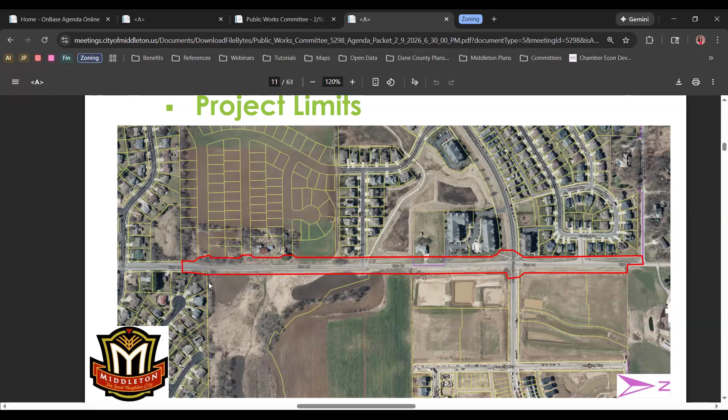Project limits: the north side to the right of the screen is Greenbrier Road, and the south side to the left is our project limit right at the end of the New Pheasant Crossing subdivision. Right now it's a very narrow road, a rural section with a hill on one side, and we're going to urbanize it into a wider section.

Right now you've got cost allocated, but as we refine this design we'll have updated cost estimates that break this down into each budget category. We're anticipating that later in April this year.

Here's the current schedule. Public Works tonight, and then Water Resources. They're working kind of hand in hand with MSA. We're going to do a handoff here on the stormwater design for this part of it, which will be presented at the next Water Resources meeting. As we continue to move forward with our design, we'll present our options at these other meetings. Currently, final design and permitting will happen in the second half of this year, with bidding in early January and construction planned for next summer.

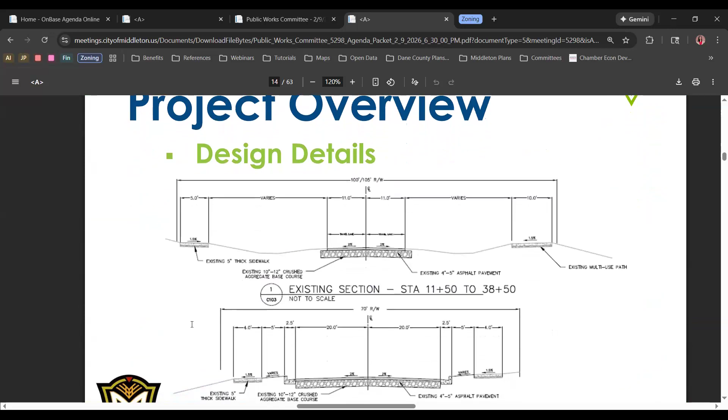This is the existing section, very narrow, maybe 20 feet wide with ditches. You have sidewalk in some spots, a path, and a future path in other spots. The other existing section is the urban section running on High Road that we're changing from, going to a little bit wider with a median.

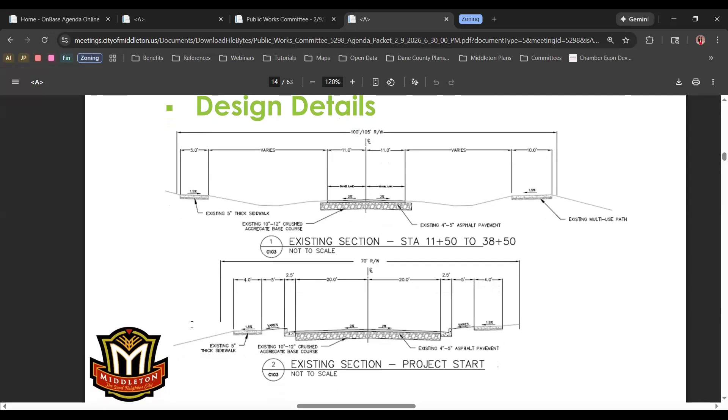We can go to the next slide, which should be the proposed details.

This is your proposed typical section. It has a wider median, with travel lanes northbound and southbound divided by that median. We have an on-street bike lane with a 2-foot buffer, then curb and gutter, a nice terrace, and on one side a 10-foot multi-use path, and on the other a 5-foot sidewalk. This median option allows for a nice left turn lane to be added where needed.

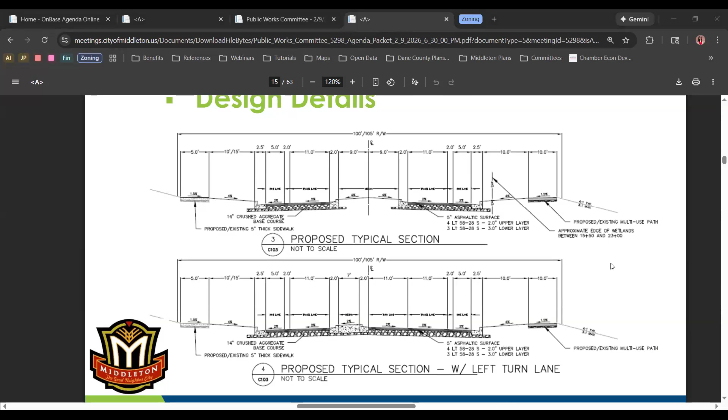At a certain part of this project, you have wetlands on the east side that we would be impacting with our typical section, shown on one of those lines about where it is, kind of behind the curb. So we would be filling wetlands with this current typical section, and that's something we'll have to run through alternates with the DNR on.

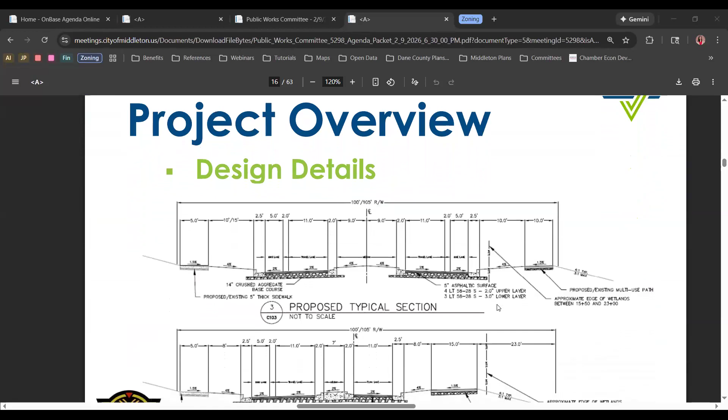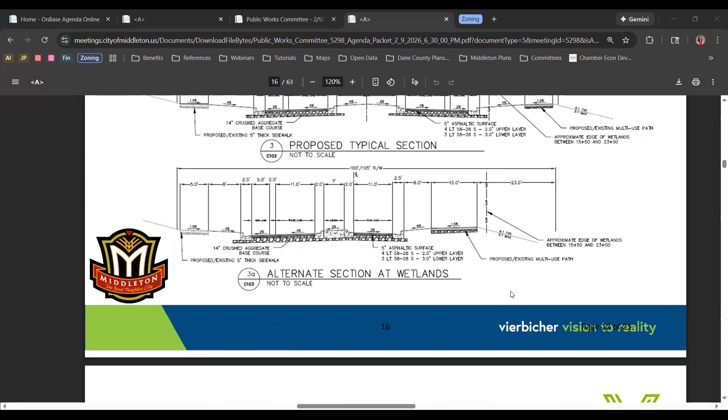That's the alternate section with the wetlands there. You could narrow it up, but it really changes the look of the road and what you'd want to do there, but it's something we need to run through with the DNR. I just wanted to bring that up.

This is the stormwater overview of the different areas and the options. The current idea is to put a bioretention basin near the Belle Fontaine intersection, with maybe some other upgrades and an oversized pipe somewhere that might get us the stormwater requirements we need. We'll learn more about that at the February 18th Water Resources meeting.

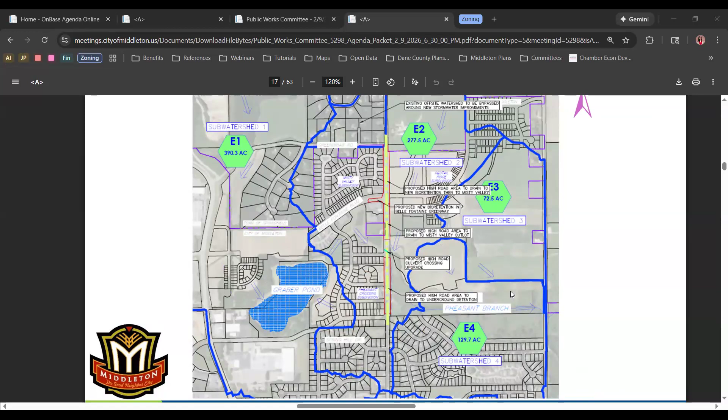We had our active input session that went really well. We got a lot of sticky note comments that I have pictures of. I basically summarized all the comments from that and the comment cards left onto an Excel spreadsheet, and shared that with city staff. I don't know if that got out to everyone, but it certainly can if you don't have it already. With that, I think you can go over to the memo.

A lot of the comments we received in discussion were based on speed concerns from the public, especially coming down the hill.

There was a lot of concern that people are too fast and won't be slowing down. There were pedestrian-related comments about where they wanted crosswalks, and whether we want rapid rectangular flashing beacons in certain spots. What's our trail connection access going to be?

There were also some construction-related comments, at least one about pedestrian access during construction. And there are some offsite concerns we can talk about—the Greenbrier intersection and Spring Hill intersection—regarding traffic there and wondering if those can be addressed somehow.

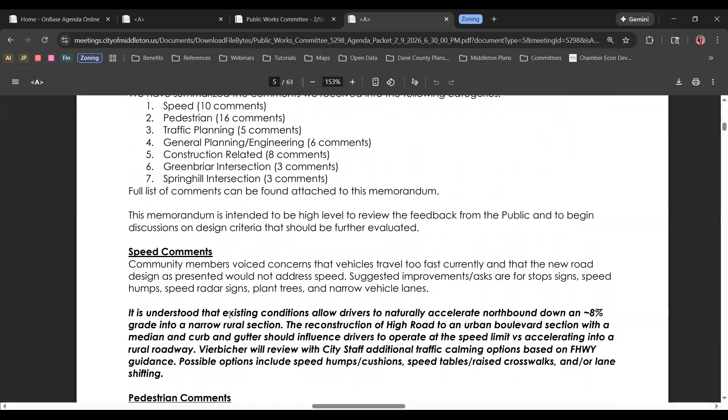That's the comments in a nutshell. They're laid out here in the memo that you guys can read. So in general, we're looking for feedback from the committees on what you'd like us to investigate with staff, further study, and come up with design options.

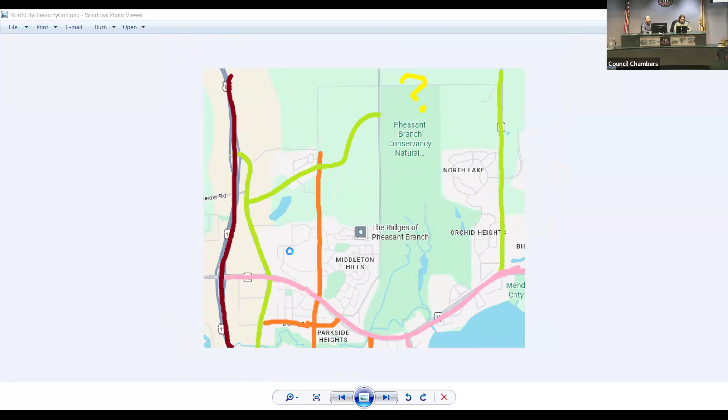So we've got three categories of streets or roads. We have our arterials, these are for fast movement. At the complete opposite end, we have the local streets - these are all just the gray Google Maps streets on this picture. The arterials are in pink and brown, and then the green are minor arterials. These are also for speed, but for speed within the city. Within orange, we have the collectors. These are in between - they tend to do neither thing well. If you've heard of the term stroad, almost all stroads are collectors or minor arterials.

The most recent traffic data for High, the only place we have it is the intersection just north of Century Avenue, down right where it's with Middleton Hills. That's from August of 2022, and that is 2,600 vehicles per day. That might sound like a lot. It is not. Broadly speaking, that works out to something like 100 vehicles per direction per hour, which is about one every 36 seconds.

Background for Bellefontaine - good time to be on this. It was originally slated to be a 4-lane with a median. It has since been narrowed. I'm not sure about its classification, I'm assuming it's still a minor arterial. It is still large enough, it still fits the needs, it's still well suited to that purpose. But as far as I can tell, that's not noted anywhere I've been able to find. With this thinking, Bellefontaine should take priority over High Road.

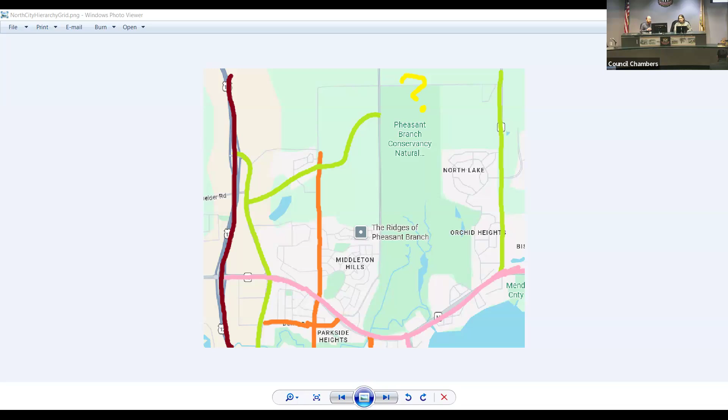So the next sketch I have has to do with the intersection of High Road and Bellefontaine. In the documents as presented by Vierbicher, High Road has priority - it has 2 lanes and a full left turn lane. And I'm presuming there's stop control or something. We discussed laying conduit for future traffic light control.

The first sketch I have here is, in a way, a little bit overkill, but let's start with that. What's going on is that Bellefontaine has priority over High Road. It looks a little bit roundabouty, but it's not. A vehicle on Bellefontaine can go straight through without stopping. A vehicle on High Road must yield in order to enter this intersection. If they are turning left onto Bellefontaine, they'll first enter right and do a U-turn. Same vice versa.

We do not have very many of these in Wisconsin, but this is a well-studied intersection type. Within the United States, we have a longer stretched out version of this that has been used for several decades in neighboring states - it's sometimes called a Michigan left. So this is a well-researched intersection type. Again, it's a little bit overkill because this is assuming that Bellefontaine would be above 8 to 10,000 ADT eventually.

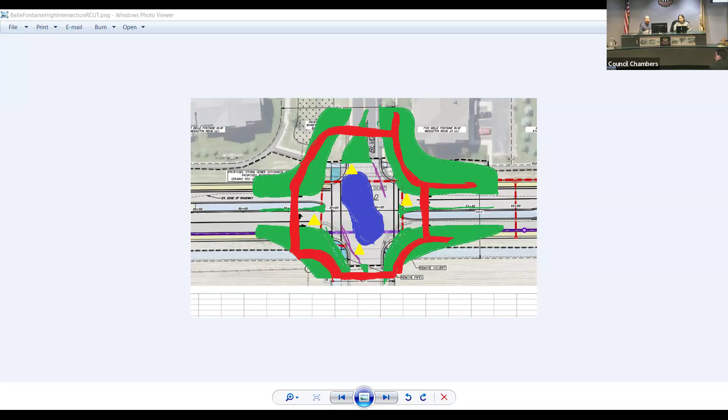That may not be necessary. This is one of those things where, in addition to having an up-to-date street hierarchy, we need an up-to-date traffic flow plan for the city. We don't really have a plan for where our traffic's gonna go, we're just kind of guessing. That's what it feels like on my end. It is extremely difficult to evaluate road diagrams like this when we're just guessing at where we'd like to end up eventually.

So with that note, the next sketch, same intersection. This assumes Bellefontaine isn't quite as busy, it's more compact. Within that, it has the advantage of not expanding the scope of the project. It is still yield controlled for High Road, but what you'll notice is the multi-use path crossings are elevated, and drivers on High Road are yielding to pedestrians and cyclists crossing on them. These would be a little bit speed bumpy, not completely - still cruise over them fast - in order to, well, there are 2 reasons: one, it helps make the pedestrians and cyclists visible, but two, it makes motorists on High Road slow down before they then, after crossing the pedestrian and cyclist crossing, yield to traffic on Bellefontaine.

All right, I'm sorry, Ted, can I ask a question? Yes.

The traffic study numbers you were mentioning - you said it's fairly constrained. Is the thought that once Bellefontaine is continuous to Schneider, all of the Greenbrier traffic going over to Parmenter will shift to Bellefontaine? Because if so, that's going to be a lot more traffic coming through this intersection. Is there a future thought that we want that traffic shifted from Greenbrier to Bellefontaine?

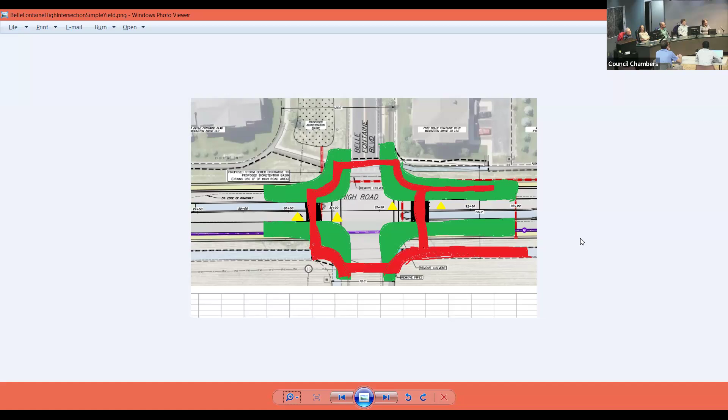Well, maybe we should jump to typical cross sections. So in this case, I've done some Street Mix typical cross sections. I've made the lanes 9.5 feet wide, but with a 2 foot element - Street Mix doesn't have a gutter element, so I'm just using the buffer. When you still have that 10 feet, you've still got an 11.5 foot visual perception for a driver of the lane. My problem with that is an 11.5 foot lane is the size of a lane for a rural highway where the speed limit is 55.

And people know that, and they're comfortable driving 55. We need that visual - we need as many visual cues as we can to get people to recognize their speed. They can't tell they're driving 25, I guess is my point, unless we give them visual information that they are driving 25. So that's why I was curious. If we don't have the answer right now, that's fine, but that's just an important element.

That's also why I've significantly narrowed the median. Yes, 18 feet is nice again for a highway, but when you space drivers far away from each other, especially if they're the only one in their lane driving, they will again tend to speed. So it's a narrower median with trees so that they have that visual information that they are going the correct speed.

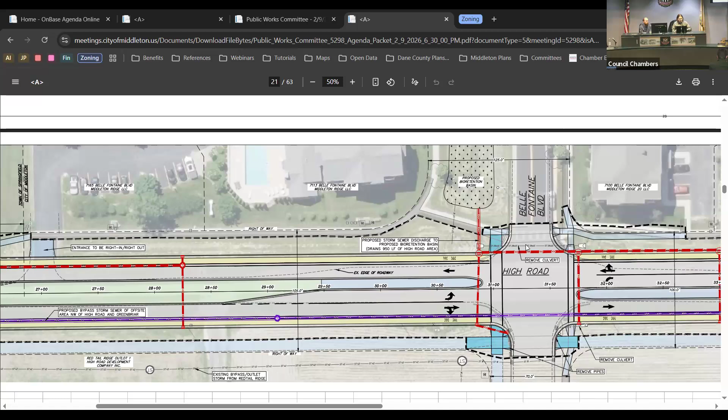Dan, do you have any comments based on what you've heard from the committee? No, I've been diligently taking notes. This was great feedback. I think we can meet with staff on a lot of these items and come up with design options for the rest of this.

I don't have any comments or questions. This is great feedback. I'll take it and work with staff on the comments and try to revise the design. Should we expect to see a design revision in April with some additional options to review? That would be our expectation. Yeah, we would definitely have a new design with different options. At this point, the design was really preliminary - we didn't even have the design options worked out yet. The purpose at this point was to throw something out there and get feedback so we can design the right options, versus guessing and not having the right ideas out there. So this feedback is what we needed to design this appropriately.

Okay, any last thoughts from the committee? I'll start with Alder Myers. Yeah, just on the subject of the protected bike lane, I do think that's critically important to include in any of our design options, because this part of High Road feeds into the next part of High Road, which feeds into Park Street, which feeds into Kromrey Middle School. Public Works, as a committee, has identified the point of High Road and Park Street and Century Avenue as a critical piece of our city infrastructure to address from a standpoint of pedestrian safety.

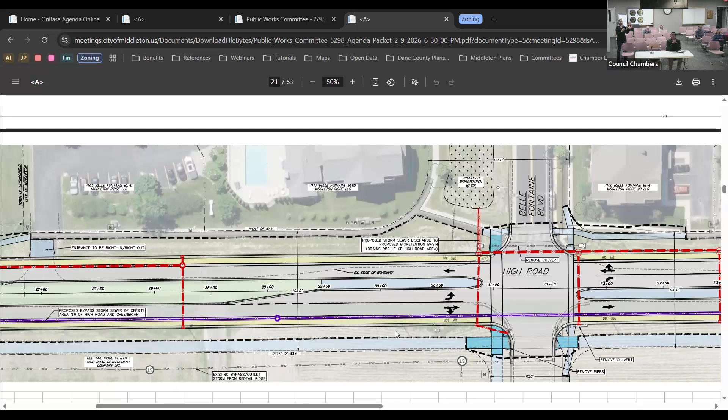I think it's really important for the design to be modified in the event that we can't get the right of way where we want it for that sidewalk. In other words, it would be unacceptable to have kids cross High Road at that point and then continue down High Road all the way to Northside Elementary and have to cross again to get to school. I think if we have to shrink the median, get rid of it, or do something creative with the road itself in this area to make sure that sidewalk is continuous, that is what I would advocate doing.

And Tim, did you have a comment? Yeah, I just wanted to bring up that Lisa had a good point on the timing and duration of the reconstruction with Century construction going on there. Do we have a good understanding of private development in that area, along with this construction on Century Ave? Because Pheasant Branch can already be dangerous, especially in summer and fall when people are going back and forth with the Conservancy, and that already has speed problems. So just food for thought.

Well, thank you, Dan, for the presentation, and thank you to all the committee members. I think that was a very productive discussion. I think we are mostly in agreement with our comments and recommendations as well. So thank you all.

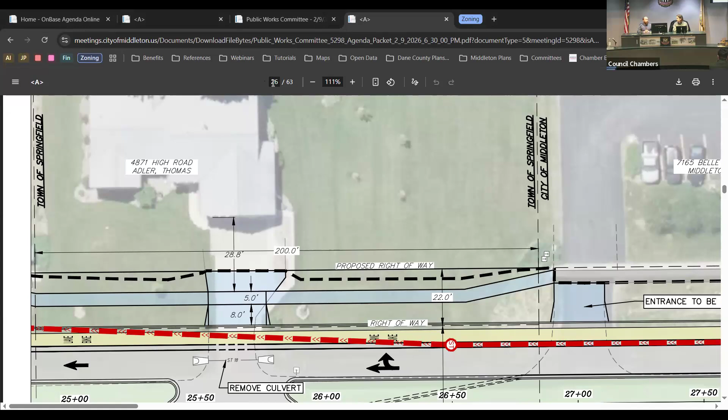Thank you. Anything on this topic? Nope. Well, I guess North Seago has those nice concrete bike lanes and it has more traffic than High Road, so we can do it. All right, next item.

Okay, we're going to move on to our next agenda item: discussion of a no turn on red sign at High Road and Century Avenue. Ben, do you want to take this one? Yeah, thank you, Chair. This was a joint request that the Public Works and Police Department received from a resident in the area pertaining to pedestrians crossing Century Avenue at the intersection with High Road.

One thing the resident requested was the installation of a no turn on red sign, similar to what you can find at a few other intersections throughout the city. So staff looked at the MUTCD, the guide for traffic control devices, and found that this intersection meets several of the requirements or recommendations for conditions where a sign like this would be appropriate. I think it's a first step in improving safety at this intersection. Long term, as Century Avenue is redeveloped and redone in 2029, as we look at other design options for that intersection, this would be low-hanging fruit to highlight the needs of pedestrians and kids crossing there. So staff are recommending that Public Works and Bike and Transit recommend to L&O and then the council an ordinance resolution to install a sign like that.

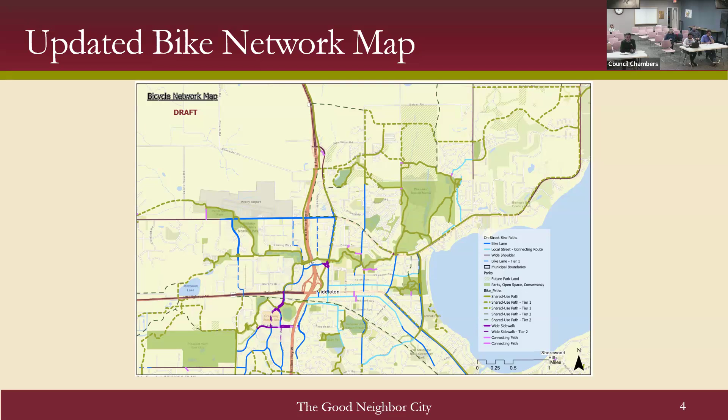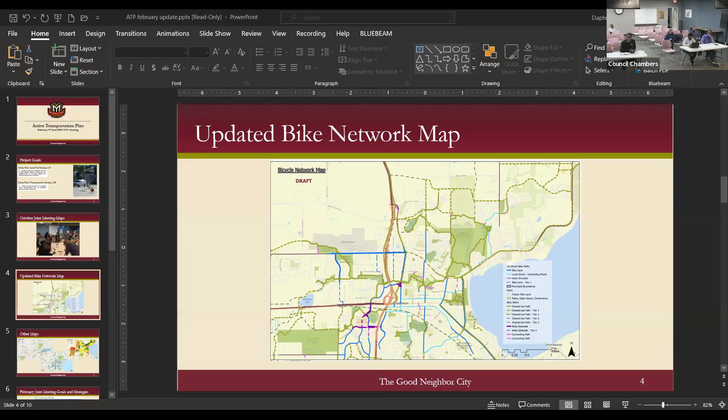Scott, under the additional maps section, bicycle and pedestrian crashes, locations where crashes have happened 2020 through present. I 100% support inclusion of this sort of map in the active transportation plan. But I do think it's important to make the map as useful as possible, both for pedestrian cyclists, planning staff, city staff, and city committee volunteers who look at it at a glance as a reference guide. And to that end, I think we do want to differentiate between the pedestrian and bicycle collisions that reasonable engineering approaches could have prevented, and pedestrian and bicycle collisions where it was a drunk driver or there was another factor.

Which is something that realistically speaking we would not be able to have engineered the road to prevent, i.e. negligent driving, gross negligent driving, driver intoxication, that sort of thing. Just so that when we're looking at the map, maybe we have two maps, one map that is the ones we could have reasonably prevented, and then the other collisions where someone did something that realistically speaking we could not have addressed with a proper road design.

Thank you. Okay. I just have a general comment that I really like the way this is put together. It's very simple, easy to read. I agree with the strategies, kind of echoing what Thea said, all the strategies are great. And just to clarify, also what she brought up was how this was going to be used.

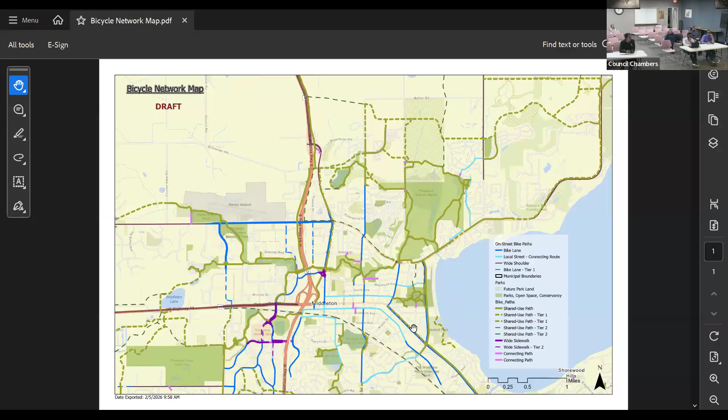In the University Avenue corridor plan, that was the segment proposed during that plan, so we just pulled that forward into this. I believe the reason is after you get past Branch, there are issues with acquiring the right of way and a lot of different conflict points that would make it harder. It's specifically the newer apartment building across from the co-op. We do not have the space because they built it too close to the road, so we do not have the space to continue the path.

Is it Peregrine? It's the Kestrel. I knew it was a bird. Yeah, we do not have space unless we do a road diet in the road.

I would just encourage all of us to be thinking about how we connect university bikers with those who want to go downtown, because it doesn't currently look like there's that conduit there. And to that point, this is not the ideal connection, but the benefit of Franklin and Elmwood being more of those local connecting streets is they can serve as a parallel route along University rather than having bikers take University itself where there's a lot more conflict points. Taking them one block off and having that as their east-west route is the next best option at this time.

Bike lanes on those streets, I think, would work out nicely. Great.

Don, yeah, I have a concern about taking the accident reports and dividing them up into, well, if we'd have designed it differently, we could have prevented that accident, versus, well, an accident is an accident. If it's a drunk driver, or a truck, or whatever it is, but liability issues come into play if we sit there and publish a document that says this was a design error on the city's part, and it could have been prevented had we designed it differently. You're just asking for issues. While I understand your concern...

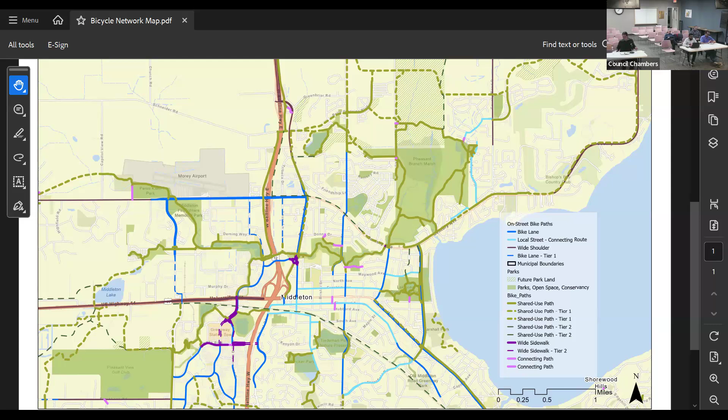So thank you all for the feedback. We'll work it into it, and I'll get writing away so we can hit the deadline for March, first draft to review. Thank you. All right. Our next agenda item is a discussion on policy process on adding sidewalks to neighborhoods.

Ben, are you taking this one? Thank you, Chair. Yes, I will start this. This came at the request of Alder Meyer, so he may have some more context. But in particular, the question or thought that we'd like the committee to consider is when we're

resurfacing streets in neighborhoods where sidewalks do not currently exist. Oftentimes, city staff will run into possibly opposition from neighbors or the neighborhood regarding installation of the sidewalks, but then that obviously goes kind of in conflict with our complete streets policy. So included in your packet is obviously the complete streets policy, which we are familiar with, but then I also included the city of Sun Prairie, which has been having similar conversations with its residents, with its committee in regards to what their policy or approach is to adding sidewalks.

So currently there, anytime there's a new development or a complete reconstruct of the roadway, both sides of the road will get sidewalks. Anytime there is a resurfacing, so it's not completely redoing the street, but you're just redoing the pavement essentially, sidewalks will be added onto one side of the street, which is kind of viewed as a compromise, I guess. But then obviously, I think you run into neighbors maybe not wanting it on one side if they have snow removal concerns or whatever it may be.

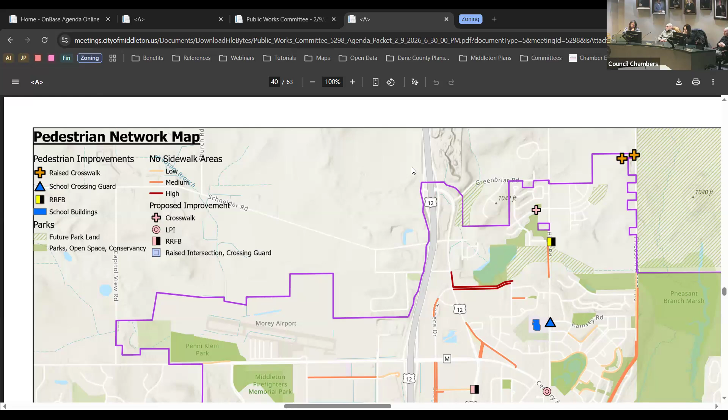Sean, your volume - when you were talking it was hard to hear you. I apologize, I'll try turning that up. So we have a question about how much sidewalk is lacking in our city.

Yeah, so this is an updated version of the sidewalk gap map that was in the comp plan, updated with sidewalks that have been added since then. Additionally, in the comp plan it just shows the gaps themselves. This version shows, if you take the prioritization from the comp plan, where all of these lie - cul-de-sac bulbs and ones that aren't really connected to other things are a lower priority, or if they're further from a school, versus ones on higher stress streets or closer to schools, as just a couple of examples that go into it. So this is the extent of them.

I believe the section that's been referenced for the landmarks is the Columbus Drive area, which is right next to the creek corridor over there, which based on the comp plan guidance would be a lower priority.

I guess my question was more for this policy, because I know we're lacking sidewalk in lots of places where we need to put it, but this specifically is talking about homeowners and its impact on them.

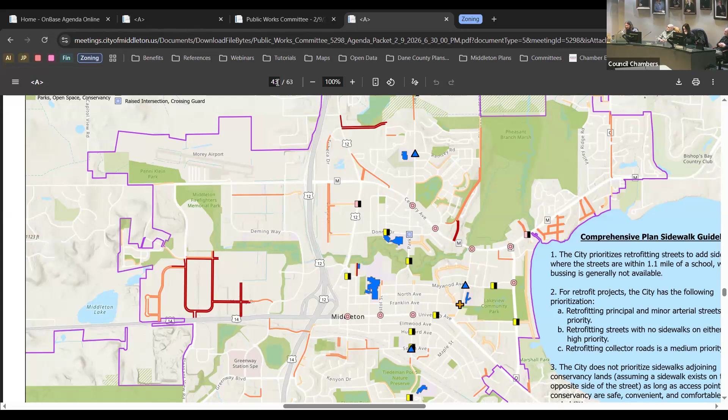Is that broken out? I'm still not seeing it. So this is everything throughout the city. As an example, Cooper Road has no sidewalk. We would love a sidewalk, but that's not impacting homeowners on that stretch. So is there something that shows just the cases where this policy would apply, when we're redoing the road and we would need to go to homeowners to put in a sidewalk?

We don't currently have it broken out that way, but if that would be helpful, we could certainly do that pretty easily, I think.

I think that's kind of the whole point of this item, to propose a change to the complete streets policy, where we would have language about the cost sharing part of where we would cover that. Is that where we would make this change? Yes, we certainly could. I don't know if we have much language on the cost part in the complete streets policy. Do you happen to know, Charles?

I think if we're going to do the cost for sidewalk installation specifically, the way we would do it is a recommendation to the Finance and Personnel Committee and to Common Council, to specifically clarify that in the event the city chooses to retrofit a street with sidewalks, the cost for the initial installation will be borne by the city, and then the homeowner will become the maintaining authority.

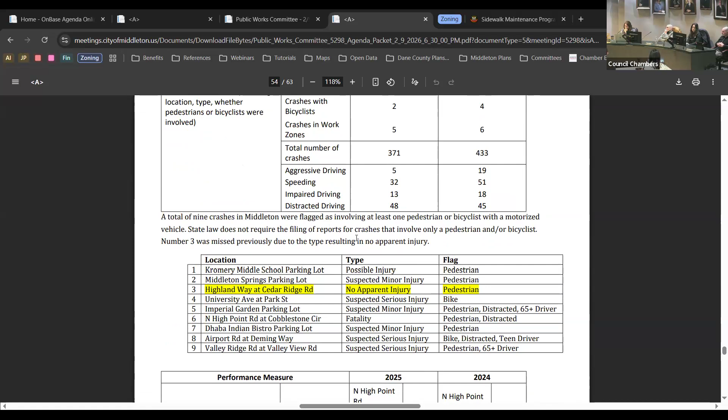Then at the last meeting, Ped Bike Transit discussed removing performance measure 8 just because it's really tough for the city to track how much impervious surface we're removing. In fact, most times we aren't removing any. The example we provided was in 2024, we did the Lake Street boat launch, where the city added the boat launch and then redid Lake Street. So technically we removed impervious surface by adding in that park, but then we added a lot more impervious surface by putting in sidewalks and all of that. So it was really difficult for us to actually calculate how much was removed and added, and that's something we're talking about removing.

And then overall also engagement, we had a lot of questions about who we're trying to engage. And especially with the social media posts and all of that, what is the point or how are we getting the information out. So those are just the main takeaways. I'm happy to hear any other comments that Ped Bike Transit has, or any comments that Public Works has as well.

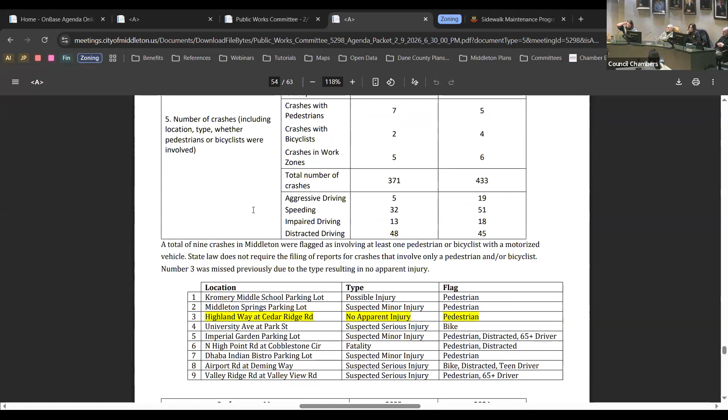Kirsten: Daphne, didn't we also remove the raised crosswalk by Sauk Trail because it's not a true raised crosswalk? Daphne: I don't recall us removing that. I remember we discussed it, but I don't think we actually talked about removing it. But yeah, that's something we could do, since it's 2 inches off the ground versus 6.

Yeah, I mean, I think if the committee has a decision... I just hate us patting ourselves on the back for something that isn't actually what it is supposed to be. I'm still very frustrated by that intersection as well. Walking past it in the winter, it was not as bad as I feared it would be in terms of snow and ice, though I only was able to get out there once. But I have not even bothered pointing it out when I've gotten rides from friends and we've driven through that and they just stop right on top of the table, because if they can't recognize that it's not a raised crosswalk before they hit it, then it has failed to do its job. So I am with Kirsten on this.

Honestly, I feel the same way about the Red Tail Ridge crosswalks. When I've walked there, they are not functionally raised crosswalks in actual implementation. And I realize we've got some engineering difficulties with some of the existing works and the civil side, but yeah.

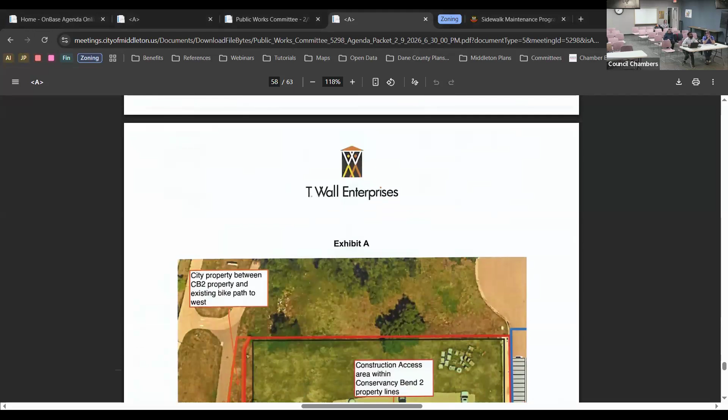In your packet you have a formal letter request from T. Wall Enterprises as well as a draft of the formal agreement. Daphne, if you could scroll down in the exhibit—this is directly west of their property. You can see the triangle-shaped area east of the bike path, right there where Daphne is circling with her mouse. This would be used for construction-related activities for this development.

Staff do not have concerns with this. The only stipulation we communicated to T. Wall Enterprises was that the bike path is not to be used for construction activities and must remain open for the majority, or all, of the development. That was staff's only directive. Happy to answer any questions, or representatives from T. Wall are here as well to answer questions.

My first question is, would they repair any damage done to the bike path or trail? Yes, if there's any damage to the bike path itself, we would require the developer to make repairs. As part of the agreement, they would also have to repair or restore any damage done to the grassy area where they're requesting the easement.

Charles: Two questions, actually three parts. First, has this been to other city committees or something similar? Second, if yes, what were those committee recommendations? And last, has this been through the city attorney's review process already?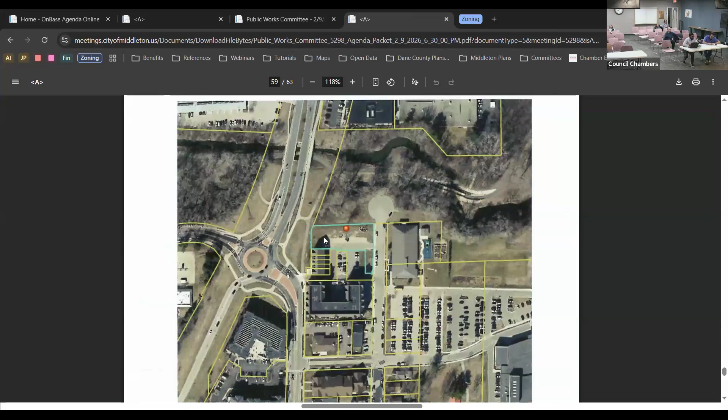Yes, I can start answering that. Kevin Short from Parks and Recreation is here as well. A similar request has been made to the Conservancy Lands Committee, for the area north of their development, which is on Conservancy land. That has been discussed at that committee, and I'll let Kevin chime in on that discussion. In terms of review by the city attorney, yes, this has gone to Matt Fleming, our city attorney.

Kevin Short, Assistant Director with Parks and Rec.

Conservancy Lands looked at a request for a temporary limited easement for the area north, an easement about 15 feet to the north of the property line. The committee requested that staff work with the developer to come up with contingencies for approval of that agreement.

And what were the results of those conversations staff have had with the developer? Ongoing, I would say. Okay.

So are we being asked to just look at the easement on the one side, like the west side? Correct, yep, this is solely separate from what the Conservancy Lands Committee is doing. This is the only request in front of you, for the western side next to the bike path. Nothing related to the Conservancy property.

Okay, thank you. I knew that something similar had gone before Conservancy Lands. I wanted to make sure this wasn't an attempt to get a different bite at the same apple. Nope, this is a separate request.

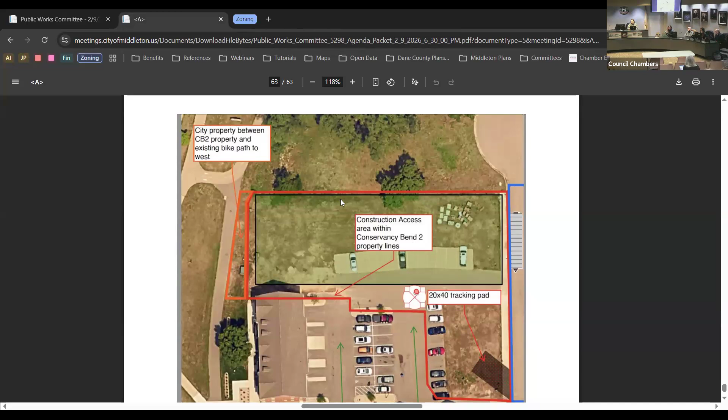All right, the motion passes. Thank you. Thanks, Kevin. Thank you, Kevin.

All right, next agenda item. Getting close to the end here. Liaison briefings. No discussion or action.

So Mary, do you have anything from Conservancy Lands Committee? Part of your committee's here, I see. Yes, it was our last Conservancy Lands meeting. We spoke about this particular easement request in the north of the parcel, 15 feet, for a significant amount of time.

Public Works did come up several times. I did reach out to Ben and Luke to let them know what was discussed. What I'd like to share as the liaison with the city was that it was suggested by T. Wall representatives that it was the city engineer's responsibility to have informed them that the land next to their parcel is zoned as a conservancy. They said they weren't aware the land directly next to the development was zoned as such.

To the best of Luke's knowledge, there were comments as far back as 2024 regarding no construction activities on the conservancy lands. The term city engineer was brought up several times, noting that if and when there is development next to conservancy lands, that should be stated early on, which it was as far back as 2024. Typically when planning receives a submission that includes preliminary plans, engineering would look at that from a high level, and that would come up, which it did.